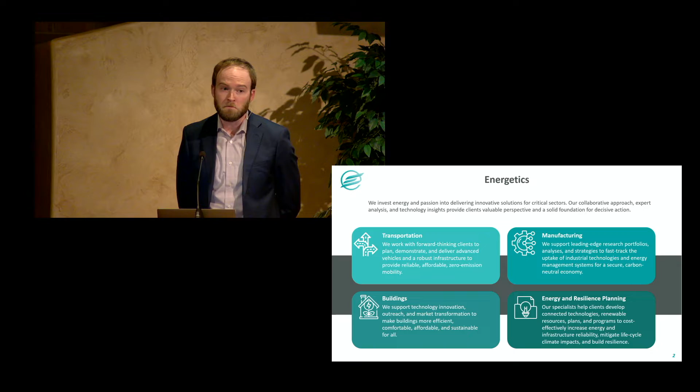We're a clean energy consulting firm that has been in business for almost 50 years. We were actually formed at the same time as the Department of Energy, in the late 1970s. Our founding fathers recognized that this fledgling thing called the Department of Energy would really need contractor support to further its agenda. So over the near 50-year history of our company, we've developed four main support areas: transportation, manufacturing, which is where I reside, green buildings, and energy and resilience planning.

Some of the work that we do, we're a company with a really deep technical bench. We really focus on technology, techno-economic analysis, and do technology feasibility studies, really trying to understand the benefits associated with technology deployment within a given industry. We'll back that up with market and economic assessments.

We're a company that is brought in to do third-party evaluation. So if there is a major player that's doing a technology demonstration, a first-of-its-kind deployment of some nascent pathway, we'll be an impartial third party that's brought in to validate those assumptions that are made.

We do a lot of strategic planning and technical road mapping, so we are contracted by our clients to do stakeholder engagement. We'll bring in stakeholders in a given industry, pick their brain. We do all the meeting planning, facilitate those meetings, do all the data analysis and the reporting associated with those stakeholder engagement events.

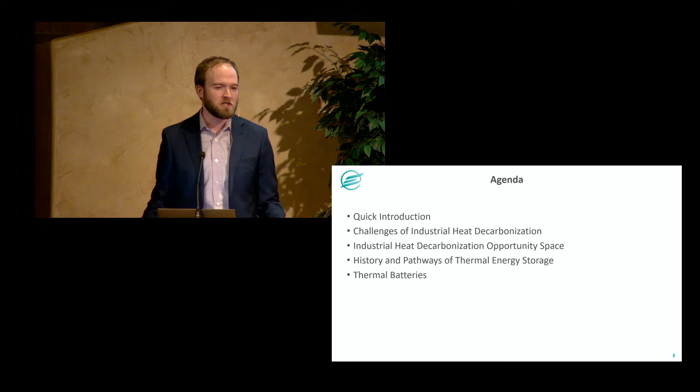So this talk today, I'm going to give a quick introduction of myself, and then launch into the talk where I'll cover challenges of industrial heat decarbonization, and then get into what are the opportunities, what are the solution pathways to decarbonize industrial heat. I'll then drill a little bit deeper into the history and the particular pathways associated with thermal energy storage, or thermal batteries, and then give some specific information about thermal batteries and some of their competing technologies.

So a little brief blurb about myself. I hail from the great state of Indiana, and studied chemistry and German at Indiana University. I liked those two things so much, I decided to go to Germany and study chemistry there. I did a master's degree at the Clausthal University of Technology, and afterwards worked as a researcher at the German Aerospace Center for networked energy systems.

My girlfriend at the time told me I better come home or else. So I came home and we got married and everything was great. But I came back here and went to the Colorado School of Mines to do my PhD in applied chemistry, materials chemistry to be specific, but leveraged a lot of those relationships in Germany to continue the collaborations with Max Planck Institutes for colloids and interfaces and coal research.

I then did a postdoc in material science at NREL, where I actually did research in thermal energy storage, so I'll touch on that a little bit. And now in recent years, I've transitioned to consulting, and I'm now a senior scientist and lead our industrial decarbonization analysis and modeling.

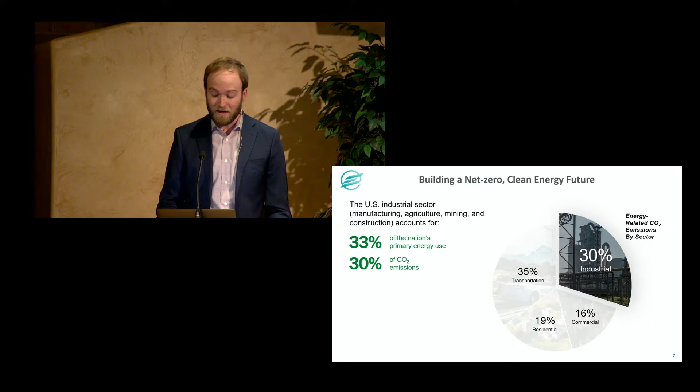So let's start talking about the industrial sector. Building a net zero clean future must include decarbonization of the industrial sector. The industrial sector accounts for 33% of the nation's primary energy use and 30% of its energy-related CO2 emissions. We anticipate our economy to grow from now until 2050, and the anticipated growth of 30% in the industrial sector could contribute to a 17% increase in CO2 emissions.

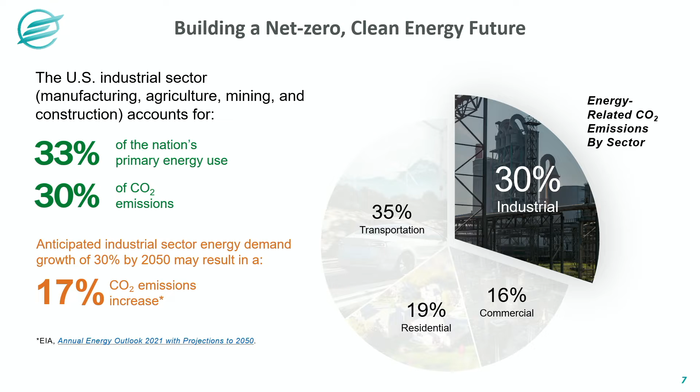So we really need to focus on industrial decarbonization and consider it an opportunity for America's economy. The manufacturing sector contributes nearly $2.8 trillion to the US economy, generates 12% of our GDP, and supports over 11 million jobs in this country. It's critical to decrease CO2 emissions while maintaining global competitiveness of US manufacturing.

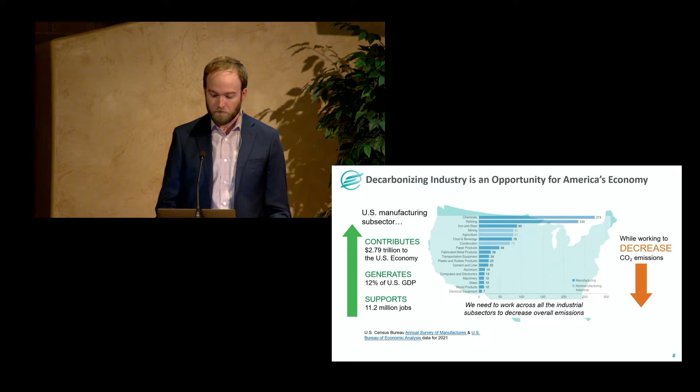This horizontal bar chart shows millions of metric tons of CO2 released annually in the United States. At the top you see chemicals, refining, major industries in this country. The dark blue are manufacturing sectors. The light blue are non-manufacturing industrial sectors of construction, agriculture, and mining. All are part of the parent industrial sector.

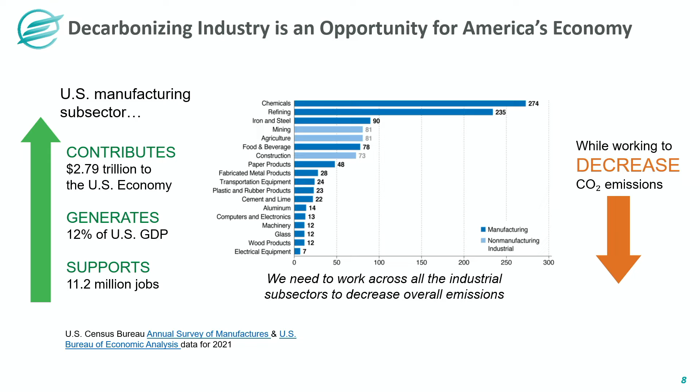All of these sectors, whether it's chemicals all the way down to glass manufacturing or fabricated metals, are extremely different and heterogeneous in their processes. So it's important that we work across all industrial subsectors to decrease overall emissions, and it's clear that there is no one-size-fits-all solution.

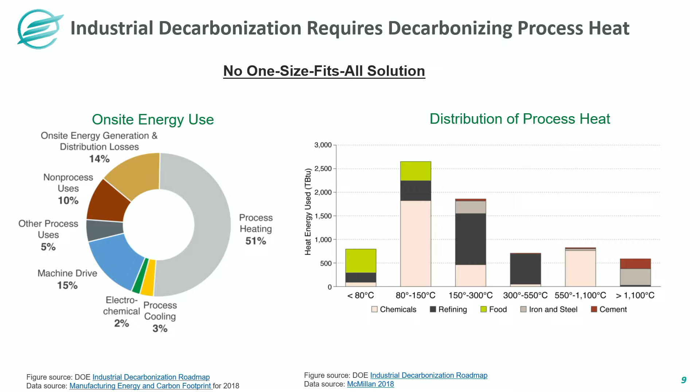This donut chart on the left shows on-site energy use, the energy used inside manufacturing facilities in this country, of all industrial sectors. What you see is that over 50% of the on-site energy use is for process heating, simply combusting fossil fuels to generate heat to drive some sort of industrial process.

On the right are bar charts that show the distribution of process heat of the five energy and emissions intensive industries in this country: chemicals, refining, food and beverage, iron and steel, and cement. From left to right, you see the process heat demand for particular sectors. Sectors like food have very low process heat demands, less than 80 degrees Celsius, mostly for drying and dewatering of food. But if you go all the way to the right, process heat demands are greater than 1,100 degrees Celsius, for industries like cement and iron and steel.

What's clear is that the solutions for those two options are completely different. I want to emphasize that a little further. Thermal demand below, let's say, 150 Celsius is an excellent candidate temperature regime for electrified technologies. Heat pumps are a technology that people are throwing around a lot now, but you can't just throw heat pumps into a cement kiln or a blast furnace in an iron and steel manufacturing facility. So thermal demands above 150 Celsius may require alternative sources of heat.

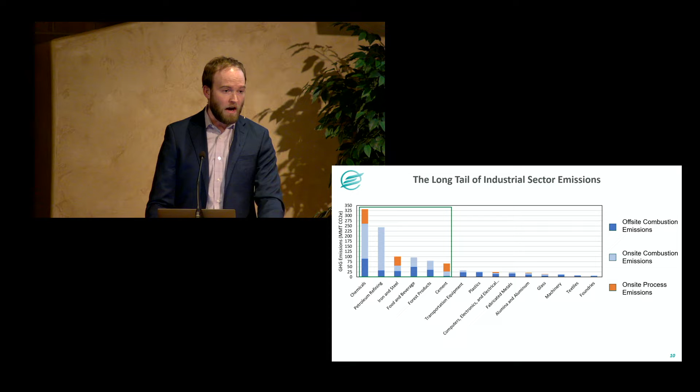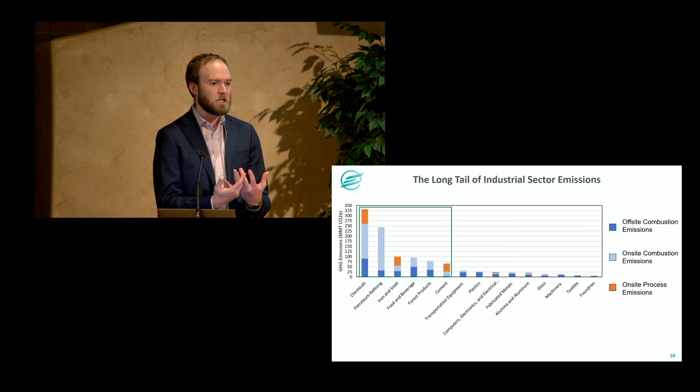Chemicals, big dog on the left. All of our energy and emissions intensive industries are on the left, and we could invest trillions of dollars just decarbonizing those five on the left. But I want to emphasize that there is a long tail of industrial sector emissions. We could focus on those five that are in the green box, but collectively on the right, all those that are not inside the green box, while individually they don't have a major footprint, collectively they're still a major emissions contributor.

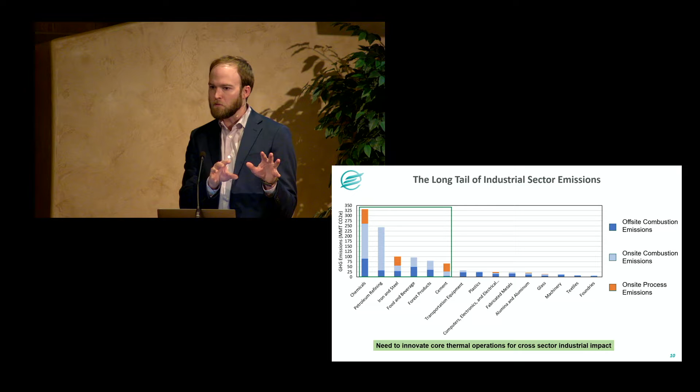So I want to emphasize here that we need to innovate core thermal operations for cross-sectoral impacts. Focusing all of our efforts on chemicals may not be suitable for foundries and textiles all the way on the right. But this cross-sectoral approach is challenging. It's challenging, but it's necessary.

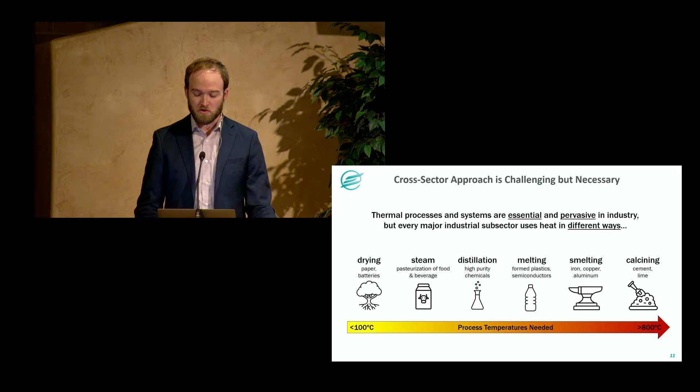Thermal processes and systems are essential and pervasive in industry, and every major industrial subsector needs heat and uses heat, but in different ways. There may be paper or food operations that are simply for drying and require low process heat, less than 100 degrees C. But as you get up to distillation processes in the chemicals industry, melting and forming operations for the plastics industry, smelting for metals, or calcination in the cement industry, you start getting to process heat demands that are very, very high.

Never been done before. And while that sounds like a lot of money, and it is, there are still systemic barriers to industrial decarbonization. A separate report published by the Department of Energy just this past summer estimates that the investment needed to decarbonize just the 8 industrial sectors shown here could cost somewhere between $700 billion and $1.1 trillion. That far exceeds what we have from IRA and BIL.

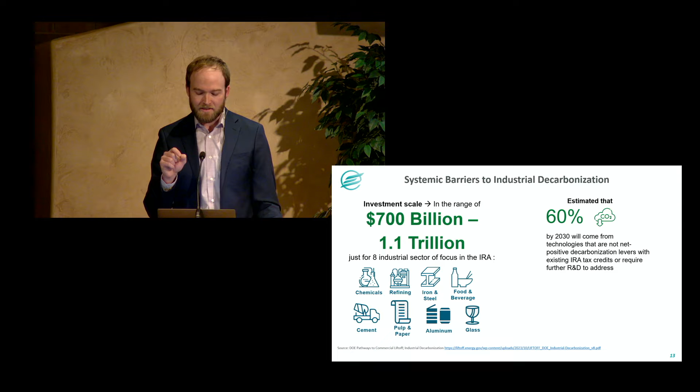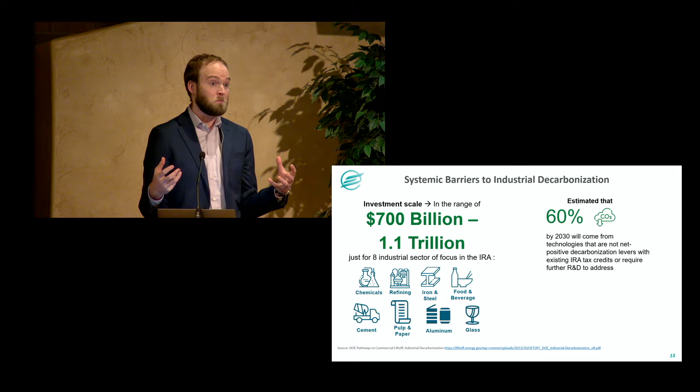That same report estimates that 60% of CO2 reductions by 2030 will come from technologies that do not yet have a net positive lever with existing IRA tax credits, which means that 60% chunk is going to require research and development into technologies that have not yet been industrialized. So I want to emphasize that targeted investment for research, development, and pilot-scale demonstrations is needed and is an opportunity for U.S. manufacturing.

But the U.S. Department of Energy has a real guiding light in the Industrial Decarbonization Roadmap, which was published in support of efforts from my company in the fall of 2022. This outlines barriers to industrial decarbonization and opportunities for industrial decarbonization. In that report are highlighted 4 interrelated and cross-cutting strategies to pursue in parallel. They're called the industrial decarbonization pillars: energy efficiency, industrial electrification, low-carbon fuels, feedstocks and energy sources, and carbon capture, utilization, and storage. Together, these things, working in tandem, can decarbonize the industrial sector.

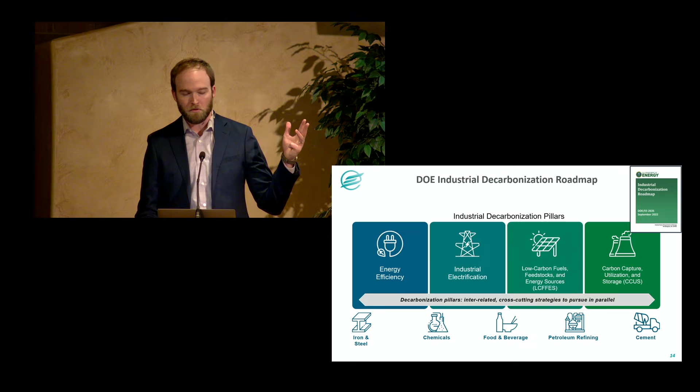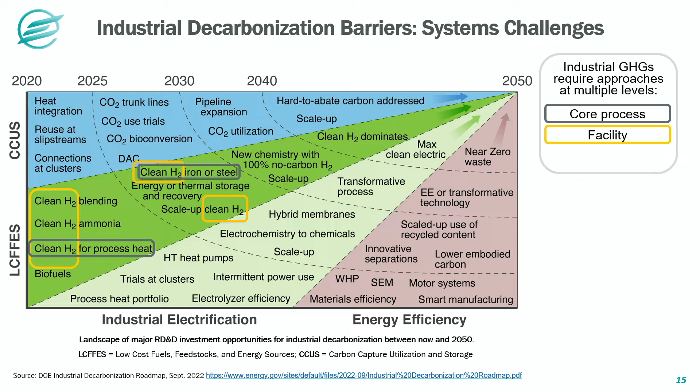But it goes beyond just the core unit operations. We need to start thinking about, well, how am I going to get hydrogen into my facility? Am I going to start producing hydrogen on site? Do I have the footprint to produce hydrogen on site? Am I going to buy it from some off-site merchant? How much is that going to cost me? Where am I going to get it from? What's the carbon intensity of that hydrogen? If I'm using gray hydrogen produced with natural gas, what's the point of investing in hydrogen? I'll just use natural gas.

But it goes beyond the facility level. What about beyond the plant bounds? This is where I highlight energy and thermal energy storage and recovery. If we really want to realize decarbonization on an economy-wide scale, we need to be thinking about all these things in tandem: innovating on the core fundamental unit operation level, innovating at the facility level, innovating on the economy level. And so this starts bringing up some questions.

What are the implications of expanded hydrogen use and generation? What are the implications of new thermal energy sources and systems? How can we do this smart? Not like the 1860s industrial revolution, but how do we do this smart in the 21st century? How do we integrate automation? How do we integrate all these things together? How do we do data analytics? How can we leverage that?

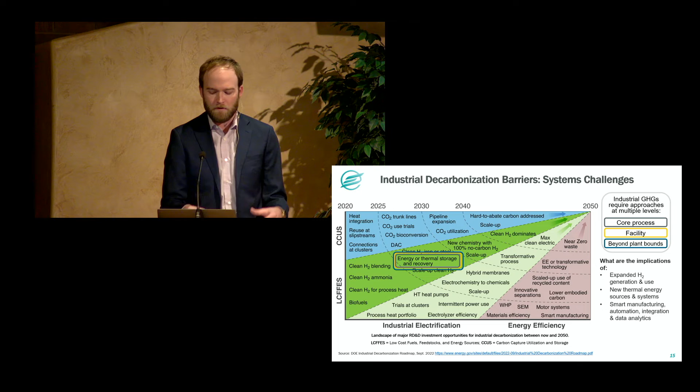What does transition to clean electricity really look like in an industrial facility? And how can we leverage our analysis and our know-how to continue pushing policy forward? IRA and BIL are great starts, but we need to keep moving forward.

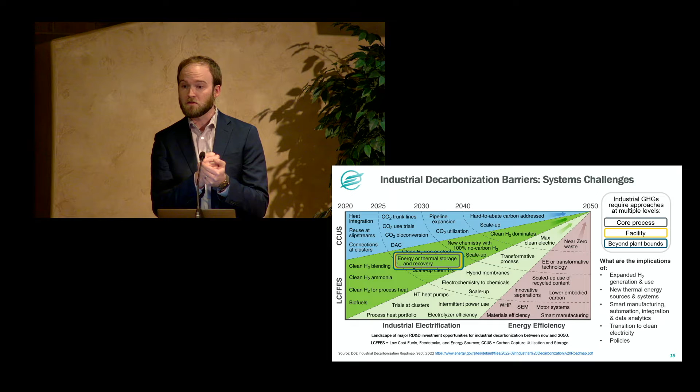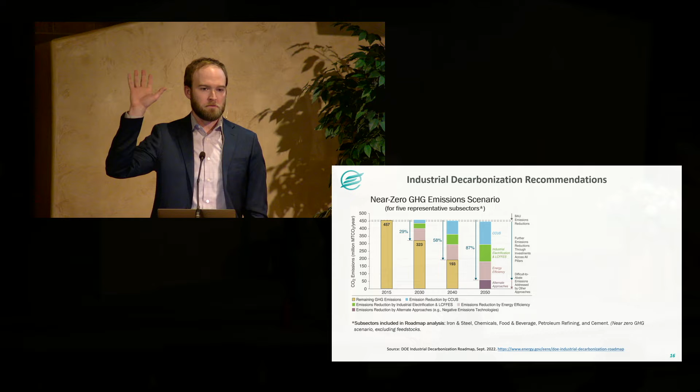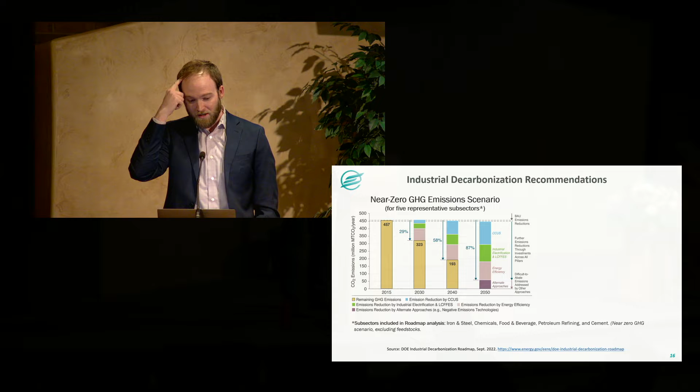But I want to emphasize that there's hope. This is kind of the flagship graphic from the Industrial Decarbonization Roadmap. If you guys want to read all 480 pages, I really encourage it. It'll put you to bed.

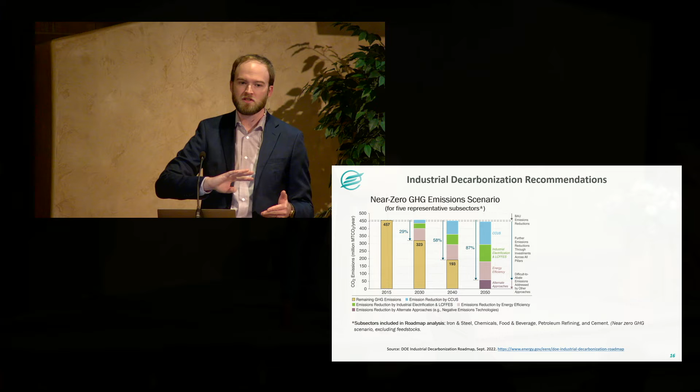But if you take nothing else away, take something away from this. If you look at the far right, the stacked bar chart there of the different colors, that is the most optimistic near net zero scenario analysis that we did. It shows that if you do these four decarbonization pillars in tandem, carbon capture utilization and storage, low carbon fuels, feedstocks and energy sources, electrification, energy efficiency, by 2050 we could approach nearly 90% emissions reductions. But that remaining 10 on the bottom, alternate approaches, shows that even if everything goes swimmingly, there's still research, development, demonstration that's going to be needed to innovate emerging nascent technologies to fill that gap.

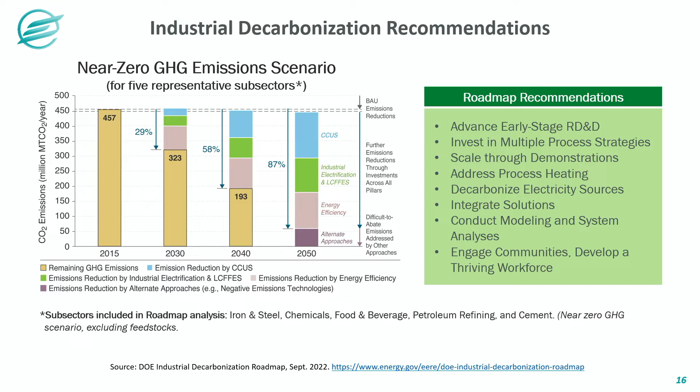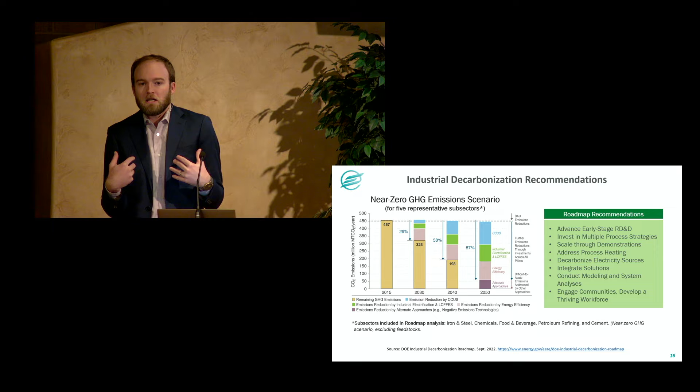And the roadmap highlights specific recommendations that really guide the investments that the Department of Energy is making today. We need to continue to advance early stage RD&D, research, development, and demonstration. We need to invest in multiple process strategies. We need to really emphasize demonstrations. Industry is averse to risk. They want people to show them that there's no risk. Let's demonstrate that there's little to minimal risk so that these technologies can be industrialized and incorporated into the commercial sector.

We need to address process heating. I hope I've emphasized that. That's the big dog that we need to tackle. We need to decarbonize electricity sources, conduct modeling and systems analysis, and engage with the community and develop the workforce that is going to take us to those 2050 goals.

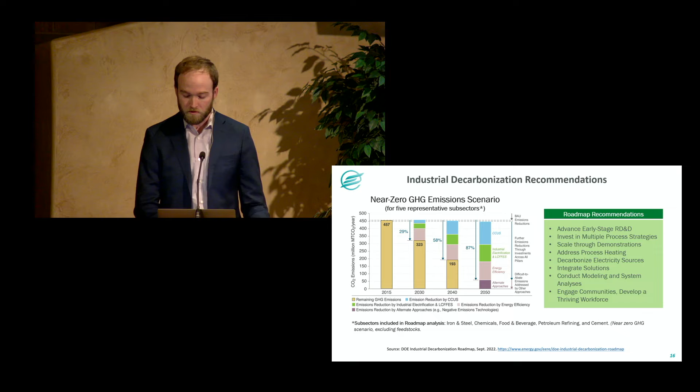So I gave you an overview on industrial decarbonization. And now I want to drill a little bit deeper and start picking at industrial heat a little bit more specifically. So the Biden administration, one of the first things they did is they kicked off this initiative called the Energy Earthshot, which harkens back to the moonshot that Kennedy kicked off in the 1960s, that decarbonization is such a critical need that we need an all-hands-on-deck approach to tackle some of these really critical cross-cutting challenges.

So I encourage folks to look up the Energy Earthshots. There's 8 of them in total. There's one on long-duration energy storage. There's one on hydrogen, on geothermal. There's one on buildings. This one, my favorite, of course, is the Industrial Heat Shot, which has a target to develop cost-competitive industrial heat decarbonization technologies with at least 85% lower greenhouse gas emissions by 2035.

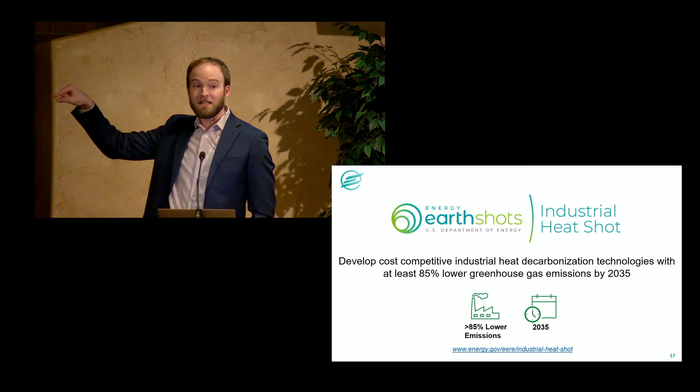That 2035 is really important because we need to meet this goal so that we can really meet the overall 2050 goal, 15 years later. So in this heat shot, the imperatives of decarbonization of U.S. industrial heat were identified. The first is that incremental solutions are insufficient. Business as usual is insufficient. We need to have another industrial revolution that reinvents the manufacturing and industrial sector.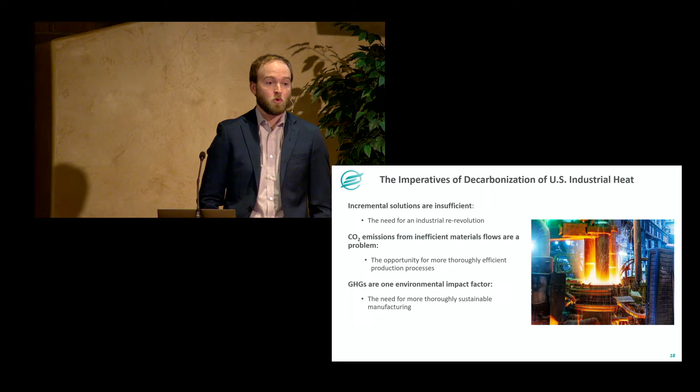CO2 emissions from inefficient material flows are a problem. We need to be efficient in production processes, and greenhouse gases are just one environmental factor. What about pollution more broadly? What about people that are affected at the fence line? What about historically disadvantaged communities? We need to make sure that the next generation of manufacturing is sustainable and does not add additional burden to communities that have historically shouldered much of the burden of manufacturing. Cancer Alley in the Gulf Coast comes to mind.

The Industrial Heat Shot identified some key characteristics. Manufacturing is diverse, it's heterogeneous, it's got a lot of different processes, a lot of different operations. Heat is used in tons of different ways. So we need solutions that meet or exceed operational demands today, that are cost competitive, industry's got to buy into this, and can achieve industrial scale, really important.

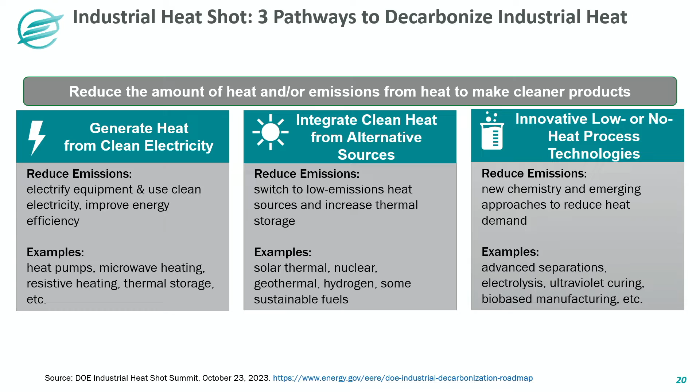So the source on the bottom here, the Industrial Heat Shot Summit, happened October of last year, just a few months ago. The Secretary of Energy presented, Deputy Secretary Turk presented, John Podesta from the White House, congressmen were there presenting on the importance of this industrial heat shot.

And in that summit, 3 pathways were identified. Pathway number 1, we need to generate heat from clean electricity. This includes heat pumps, thermal energy storage is thrown in there. We need to also integrate clean heat from alternate sources. Can we leverage the sun to generate heat? What about nuclear? What about using the heat that's right beneath our feet in geothermal resources? Hydrogen, sustainable fuels. And the final pathway is really a game changer. Can we develop innovative, low or no heat process technologies? Could we just rethink this all together? Could we just find a way to not use heat and make the same stuff that we use every day?

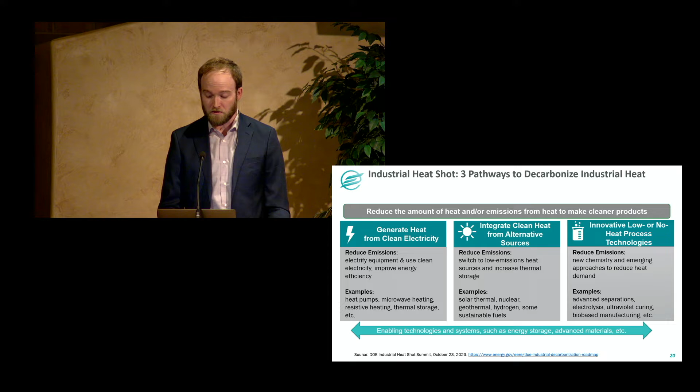Underpinning all of this is that we need to develop technologies that span all of this. We need to do things like energy storage and advanced materials and everything that serve as the foundation for these pathways. So I really want to focus on that pathway number 1, generating clean heat from clean electricity.

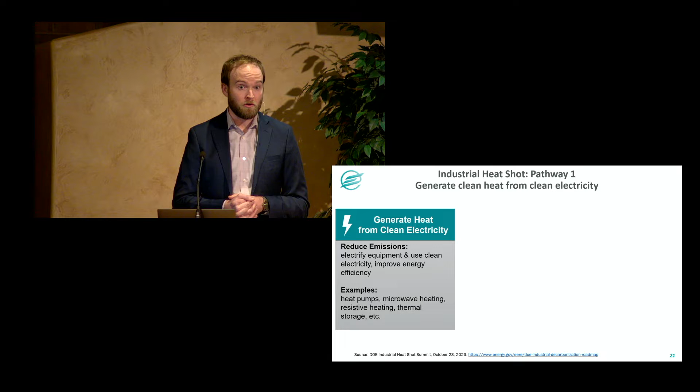Reducing emissions by electrifying equipment, using clean electricity, improving energy efficiency. Examples are heat pump, microwave heating, resistive heating, thermal energy storage. The opportunity here is we've got to reduce fossil fuel use.

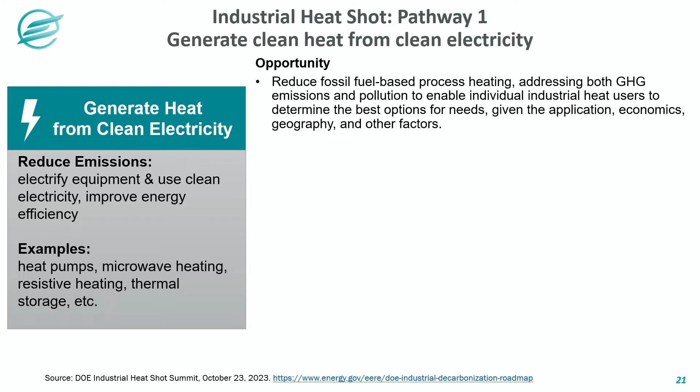Given specific applications, the economics, the geography is really important. The cost of electricity is way different in Washington State than it is in North Dakota. I'll touch on that a little bit later.

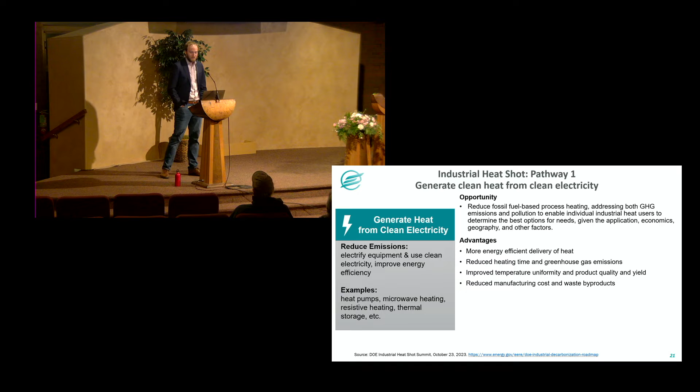What are the advantages of this pathway? Well, we can be more efficient in how we deliver heat. We can reduce heating time because electrical heat is more efficient than combustion heat. We can improve temperature uniformity, improve quality of products, the yield of products. Boy, that really gets industry people excited. We can reduce cost, also makes industry people really excited, and reduce waste byproducts.

But there's key technical challenges. Achieving these temperatures is challenging, especially given specific application requirements. Scale - we've got to get these things to industrial scale. And cost - the cost is a challenge because the cost of electricity relative to natural gas is a major barrier in this country.

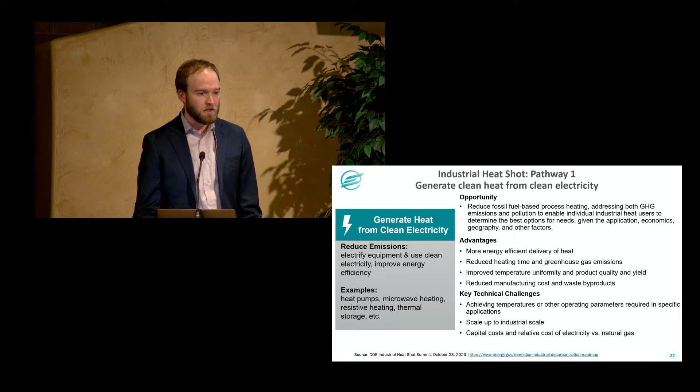I mentioned Washington and North Dakota. Washington has really, really cheap electricity prices, largely because of their hydroelectric production. So they are only 3 to 1, the cost of electricity relative to natural gas - cost of electricity is 3 times more expensive than the cost of natural gas in Washington state. Whereas in North Dakota, where they have very limited access to low-cost electricity production, it's more like 5 to 1. How do you make those economics work out on an industrial scale?

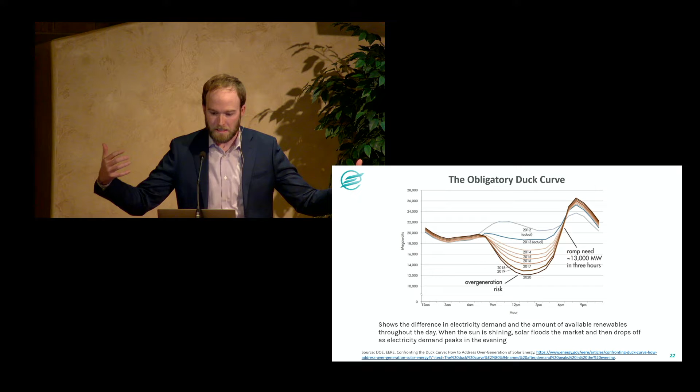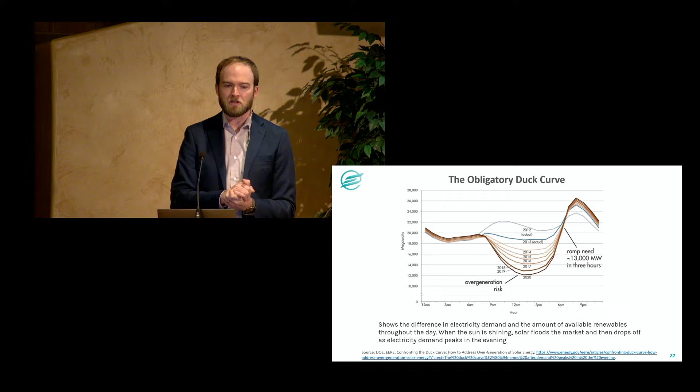We have a lot of renewable resource during the middle of the day, very little renewable resource at the end of the day. This graph shows 2012 through 2020. And already in 2020, we started reaching a point where we were at risk of overgeneration - we're producing more electricity than we could possibly need at 12 p.m. in the afternoon. But then when everyone comes home and starts turning on all their devices, boy, that puts utilities in a really difficult position with this rapid ramp up in demand.

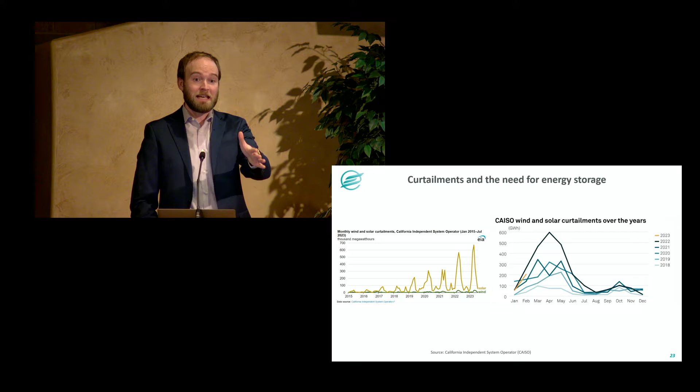And the result is something called curtailments, that we have all of these renewable assets deployed, wind farms and solar farms. What's happening is we're reaching a point where we're producing so much that we're having to shut off those assets. We're having to curtail clean electricity production because we have too much of it on the grid. This is data from California, published by the government's very own Energy Information Administration, EIA, and it shows monthly curtailments in the state of California from 2015 up until the present day in 2023. What you see is this nearly exponential rise in monthly curtailments in the state of California because there's so much renewable energy generation in that state.

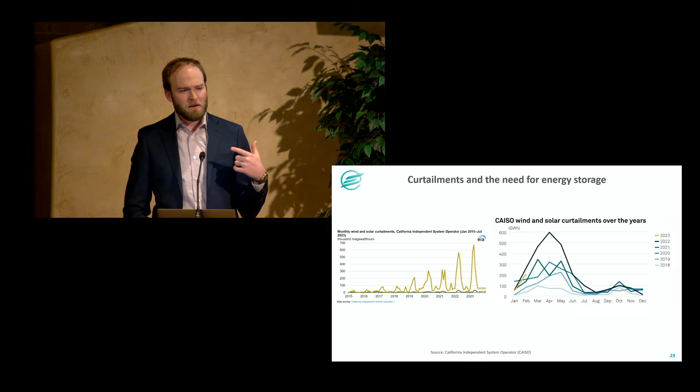Let's think about this on a monthly scale. On the right, what you see are curtailments in the months of the year. The big issue is right around now, as we're entering into spring. Sun starts coming out a little bit more, but it's not too hot, so our ACs aren't kicking on as much, and we're generating a lot of electricity. We're overproducing electricity in a seasonal fashion - too much in the spring, not enough in the summer.

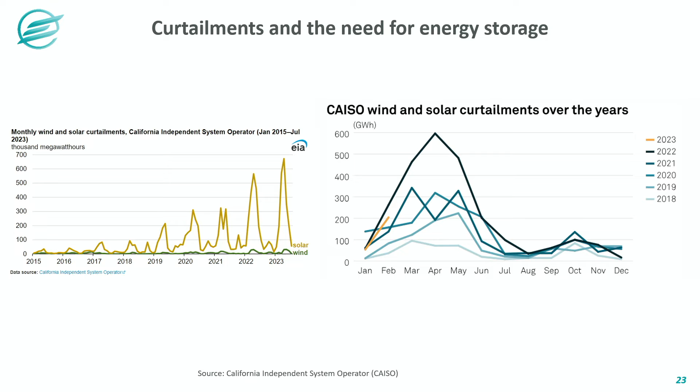Energy storage is a solution to this. Can we capture the overproduction that we have when we generate it, and then use it or dispatch it when we need it?

Likely a lot of you have seen a chart like this that shows the energy storage capacity - how much can be dispatched, so kilowatt hours on the y-axis versus the capacity on the x-axis. What's on here is a bunch of different energy storage technologies. As is typical, lithium-ion batteries are kind of closer to the bottom left. You can turn them on right away, but they don't have a whole lot of capacity. We all know we got to charge our phones every night because it runs out of batteries, right?

Whereas things like thermal energy storage are near the upper right. They have a lot of capacity and can discharge over a long period of time - hours, maybe even days. I want to emphasize that I'm not saying thermal energy storage is better than lithium-ion batteries. We need all these technologies. We can't quickly ramp up a thermal energy storage facility - it's like a diesel engine, takes a while to warm up, but then it just chugs along. Whereas lithium-ion batteries, I need power right now, boom, I got it. So these things need to be working in tandem to give us a holistic approach to energy storage.

So let's start talking about thermal energy storage. I'm at 30 minutes, hopefully I'm not boring you guys.

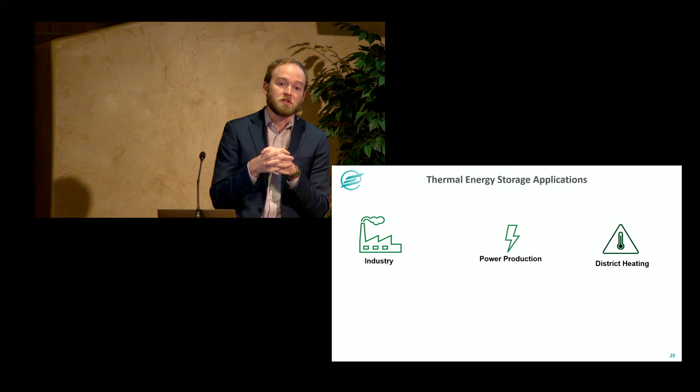Thermal energy storage applications have really taken root in three main end-use applications. The first is industry. This makes sense - there's really hard to decarbonize sectors with really high process heat demands. Thermal energy storage will enable and ensure that a manufacturing facility can have reliable 24/7 heat delivered to their operations, and it allows them to load shift. That's the big thing with energy storage - overproduction during the day, electricity is really cheap. Can I pull that off the grid and use it during those high ramp times when electricity prices start skyrocketing?

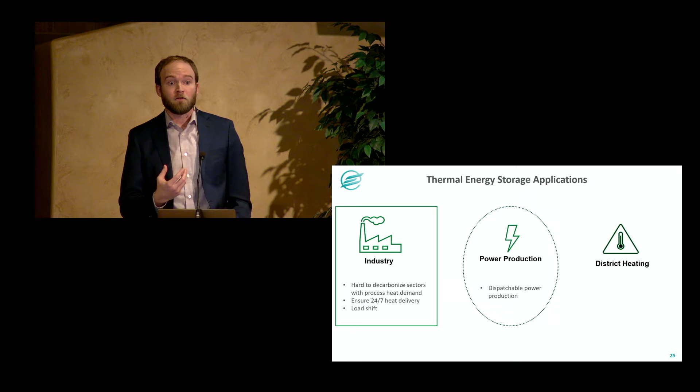The second, and I think where a lot of the learning for thermal energy storage has come from traditionally, is the power sector. Thermal energy storage has been used in the power sector to make power production dispatchable, using it when I need it. The third application I won't touch on in this talk - it's district heating. It's commonly done in Europe, less so in the United States.

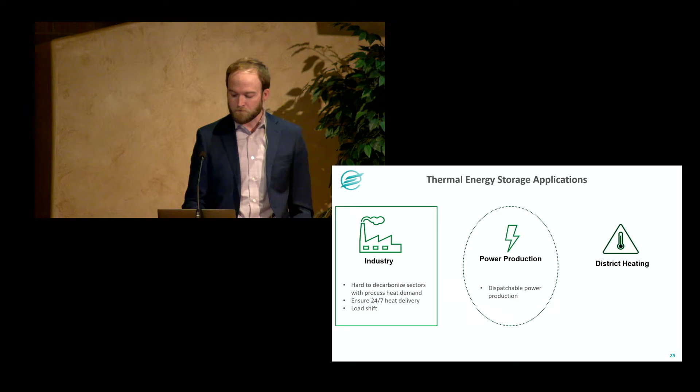Let me give a little bit of history. I'm kind of a thermal energy storage traditionalist - as Martin said, I used to be at NREL, I worked in concentrating solar power thermal energy storage. Since the 1990s, thermal energy storage has really come from power production. Let me give an overview of what thermal energy storage is for those that have not come across this in the past.

Thermal energy storage has really come in lockstep with the development of concentrating solar power. Concentrating solar power is sort of the redhead stepchild of photovoltaics. Everyone knows solar power means PV, right? Solar panels on our houses. Well, the other solar power is concentrating solar power. So let's talk about that a little bit.

In principle, what you have is a bunch of mirrors that reflect the sun's rays to a focal point - in this case, it's a tower. In that tower, you can start flowing a heat transfer fluid around, and at that focal point, the heat transfer fluid will start heating up. Isn't that great? Then you can take that heat transfer fluid down and store it in some tanks. You can store heat in a vessel, and then whenever the market says, boy, I need electricity right about now, you can flow it out of your tanks.

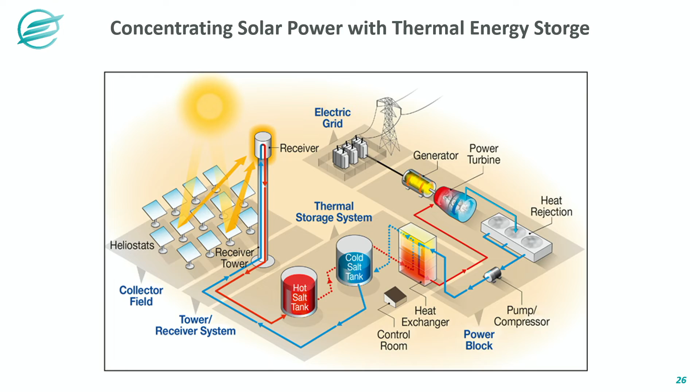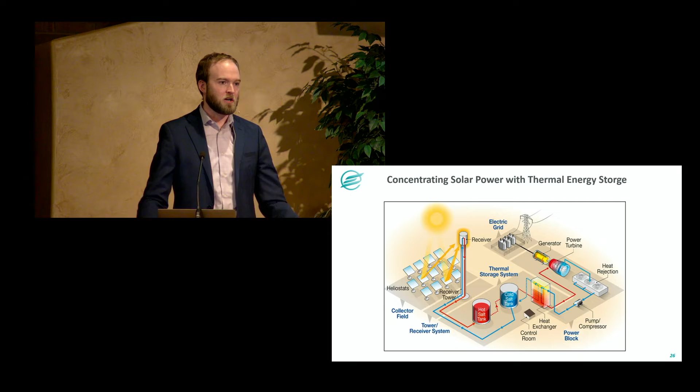I don't think I have a pointer, so I'm just going to use my hands. You can flow it out of those tanks to a power block, and then it's really no different in principle to a standard utility natural gas or coal-fired power plant. You've got a heat exchanger where you exchange the heat in your heat transfer fluid with a working fluid, usually steam, and then it flows through a Rankine steam cycle, spins a turbine, which goes to a generator. You generate electricity, boom, you got power. Isn't that great?

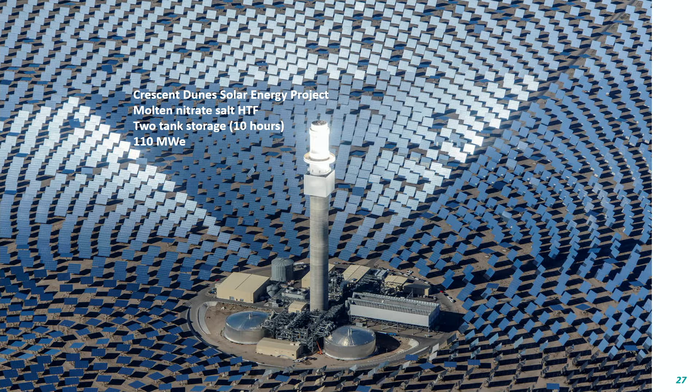This is a technology that has been deployed somewhat successfully in the United States. This is a bird's eye view of Crescent Dunes Solar Energy Project in Tonopah, Nevada. It's a molten nitrate salt power tower configuration similar to the schematic I showed on the previous slide. Molten nitrate salts is the heat transfer fluid and the storage medium at this facility. It has 2 tanks, so you see that in the foreground there, 2-tank thermal energy storage. It's rated to have a storage length of 10 hours, and it had a capacity, at least they claim to have, of 110 megawatt electric.

Pretty substantial. This is a cautionary tale, though. This particular project received about a $740 million loan from the DOE Loan Program Office to build it. It was built and commissioned in 2014. It started production in 2015 and almost immediately started experiencing problems. This company has since gone bankrupt. It's changed hands a bunch. They fixed the problem, but it doesn't nearly have the power production that it was rated to have when the project was conceived.

The issue is right there in the foreground, the thermal energy storage system. The tanks started experiencing leaks. And boy, you don't want to have molten salt leaking all over the place. It causes a lot of problems. So there's still a lot of learnings. I could talk all day about Crescent Dunes, but I just want to emphasize that this is a technology that can be built at scale, and we can take the learnings and the pitfalls from certain issues from projects and apply that to new industries like the industrial sector.

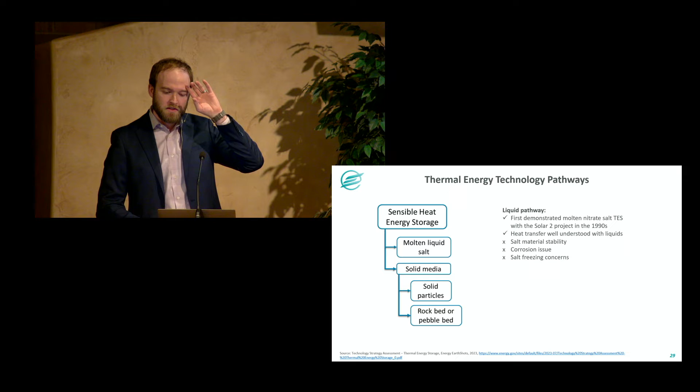So I'll do a quick overview, kind of pros and cons of each of these. Let's start with sensible heat storage. Again, there's two main pathways there, liquids and solids. For liquids, like I said, this has been demonstrated successfully. Molten nitrate salts, as I showed on a couple slides, have been in the works since the Solar 2 project was done at Sandia National Labs down in New Mexico in the mid-1990s. The benefit of liquids is heat transfer is really well understood. We do heat transfer in industry all the time. That's no big deal. Big issues here are salt material stability. I mean, think about water.

It can boil, it can break down, it can change phase—really funky stuff with these media. Corrosion issues are really, really tough. High temperature, very acidic salts will just eat away at a tank and cause it to leak, for example, in Tonopah, Nevada at Crescent Dunes.

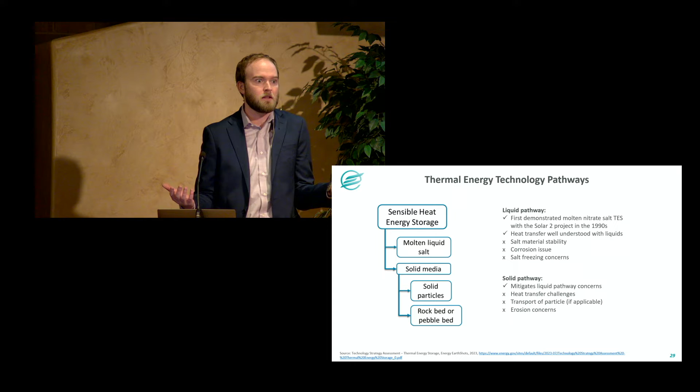Real big concern with the liquid pathway. If you start thinking about using bricks instead, well, that mitigates a lot of those concerns. It's not going to break down, it's not going to corrode, it's not going to freeze on you. It's a solid. But heat transfer is a bit more of a challenge for solids.

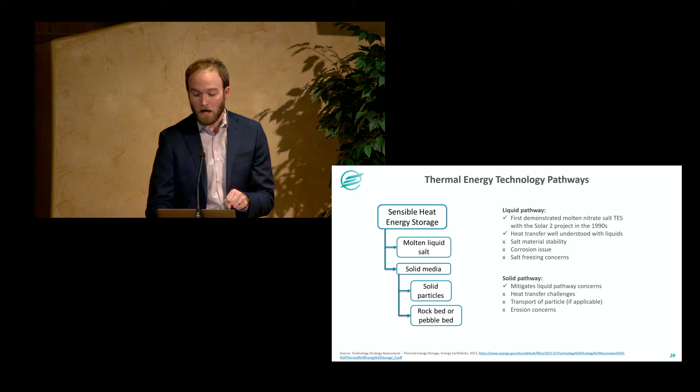The transport of the solid can be challenging if applicable, if you're using sand or particles, which are very popular right now—you've got to move that around somehow. And the final thing: instead of corrosion, we have erosion. That will start rubbing and cause mechanical degradation of your system.

On this slide, I just kind of lumped together latent heat and thermochemical energy storage because they're less cool than sensible heat storage. Latent heat is attractive because it's more energy dense. If you're transitioning from a solid to a liquid, you can store more energy in a phase transition than you can just in a single phase of matter, whether it be a solid or a liquid. So with increased energy density, that means I don't have to have as big of a footprint. That's attractive for industry. And we have centuries of experience with this.

How much have we dealt with the water, liquid water, and ice transition? In downtown Berlin, I was just there in the summer, they have a big tank for water, and they do thermal energy storage there with the transition from water to ice. That's great, but the problem is you can't reach high temperatures that are really needed for industry. It's pretty good for district heating, or heating up my water heater at home for personal use, but not for high temperature applications. Material degradation is a problem as well.

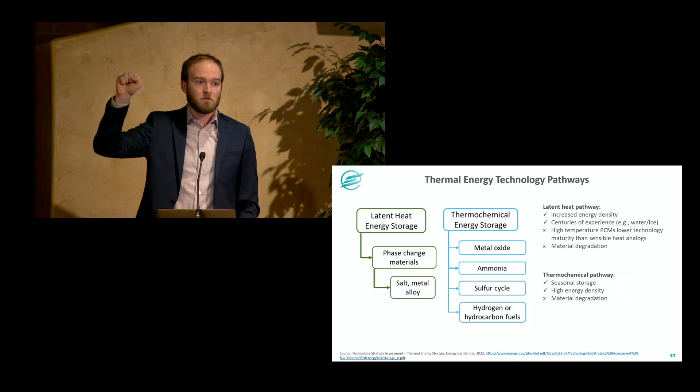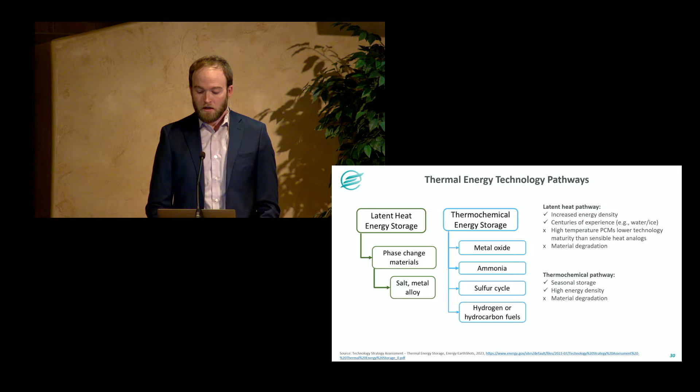For thermochemical storage, this is really the only way we could ever possibly achieve seasonal energy storage—I want to use solar energy from the spring and dispatch it in the winter. The only way to do that is to really store energy in the form of chemical bonds. It has high energy density as well, but it also has material degradation issues.

So I've given a little bit of a history of thermal energy storage. So what is a thermal battery specifically? Well, can I just take away the solar receiver from a concentrating solar power plant, and switch that energy input to something else, like abundant, clean electricity from the grid during periods of overproduction, like I was mentioning earlier? If you conceive of that, it's not too different from a concentrating solar power plant—it's just that your thermal input is a little bit different.

So instead of the sun and a solar receiver, you just have electricity driving some sort of heat pump, or an electric heater or something, that then goes into a thermal energy storage system that can then be discharged to a heat engine, like a Rankine steam cycle, like I showed before. And it's established on very sound thermodynamic principles. It's great.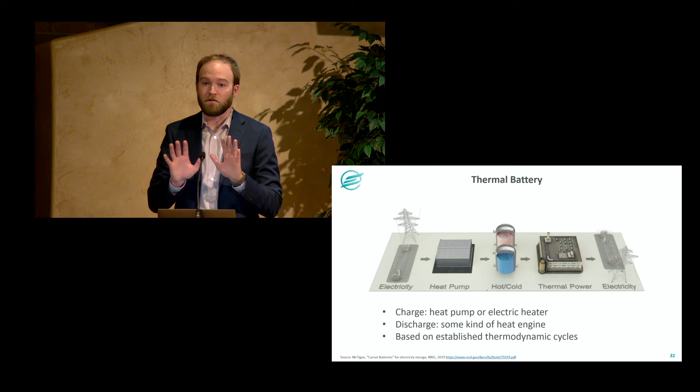It really enables you to do a lot of things. I've mentioned concentrating solar, I shouldn't talk about it anymore. But thermal energy storage allows you to get over intermittent renewables—I hope I've demonstrated that in this talk. It allows you to take base load operations like nuclear, which produces this amount of electricity all the time and doesn't change—if it does change, we have problems. So it allows you to take firm electricity production and make it dispatchable, use it when I need it. It allows you to capture high-quality unusable heat, which is particularly interesting for industry—there's a lot of waste heat in industry that just gets vented out the stacks.

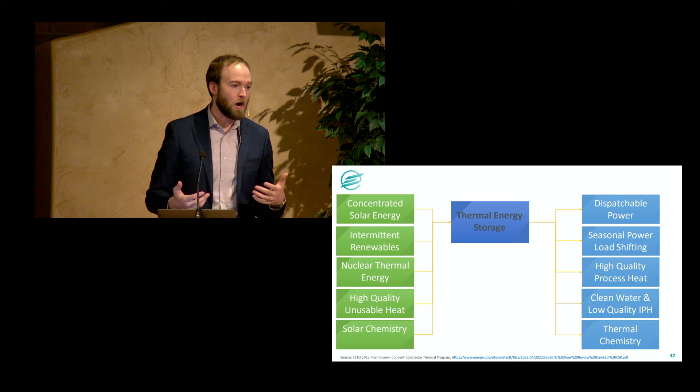We could capture that with a thermal energy storage device, and solar chemistry as well. What you get out of this is dispatchable power - I'm going to get power when I need it. It allows you to load shift, sometimes seasonally, but certainly on a diurnal basis, tens of hours kind of thing. It allows you to deliver high-quality process heat to industry, do municipal operations like water purification for drinking, and other applications for low-quality process heat. And it allows you to do thermal chemistry - can I make the products that we all rely on using inputs other than fossil fuels?

I just want to highlight at the end of my talk some resources. This is data from a publication that came out over the summer - DOE put out a pathways to commercial liftoff for long duration energy storage. This is focused on power production, not thermal energy storage for industry, but it's instructive because it looks at the barriers, opportunities, and economics of competing energy storage technologies, including thermal. On this chart you see the capacity - how much energy you've got in your storage device.

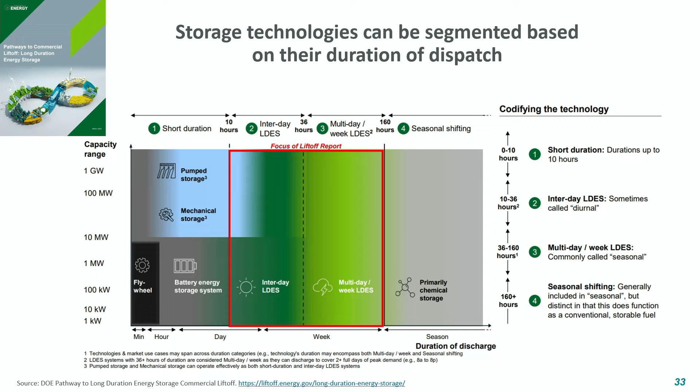Versus its duration of discharge - how much energy can I get over an amount of time. In the red box is where thermal energy storage, right there in the middle, sits. A lot of the things I've been talking about are indicated on this slide. Chemicals, storing energy in the form of chemical bonds, will give you seasonal energy storage for as long as you want. Whereas things like batteries and flywheels are on that lower capacity, lower discharge duration on the bottom left.

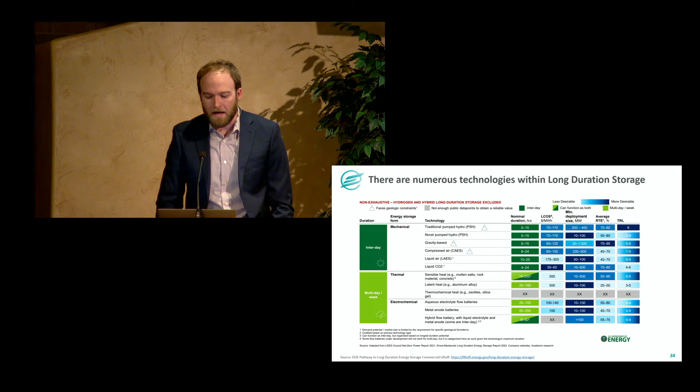Something really instructive about this is the report looked at a lot of the properties or aspects you want to see out of competing energy storage technologies. I drew a little box around thermal there - it's one of those technologies that can give you multi-hour, maybe multi-day energy storage capability. On this chart they looked at how many hours can you store, what is the levelized cost of storage - how many dollars per megawatt hour does it cost me, what's its size, how much can I deploy in megawatts, and what is its average round-trip efficiency, that's what RTE stands for.

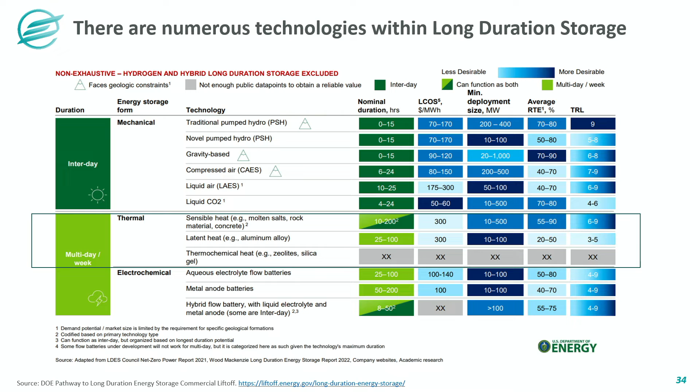And TRL - technology readiness level. 9 means this thing is ready for prime time, ready to be deployed in industry. 1 means this is still in the academic phase, needs a lot of research and development. What I want to emphasize is dark blue means more desirable, light blue means less desirable. Thermal energy storage has a lot of desirable attributes - it's dark blue, really great, except for the levelized cost of storage which is on the light blue end. So there's still a lot of work to make this technology cost competitive.

The final eye-crossing chart I'll show today is supply chain vulnerabilities. We need to be thinking about this from a Department of Energy standpoint. We can't be reliant on foreign supply chains or materials from conflict zones or from political adversaries - these are things we need to consider in the Department of Energy. We've certainly seen the issues with supply chain reliance as part of the COVID-19 pandemic, so it's really important to study this.

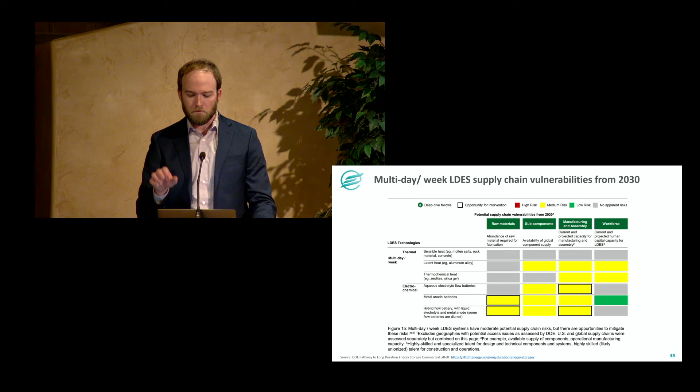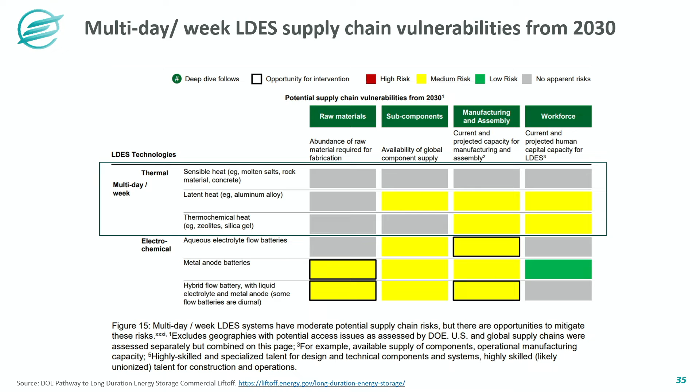Here we have a stoplight approach - green, yellow, red means low, medium, and high risk, gray means there's no apparent risk for raw materials acquisition, the subcomponents necessary to build your system, the manufacturing and assembly of your energy storage system, and the workforce needed to build it. Highlighted here is thermal energy storage, and I really want to emphasize the sensible heat at the very top, which is what is being deployed commercially today and I think will be the front runner from now until 2050. It's all gray - there are no apparent supply chain risks for this particular technology pathway. It really demonstrates that this is something we can invest in with some level of certainty.

So kind of wrapping things up, I just want to emphasize that industrial decarbonization is informed by stakeholder engagement and by analysis.

It is really important that investment decisions, whether you're the Department of Energy or you're a business, are made in a defensible and justifiable manner.

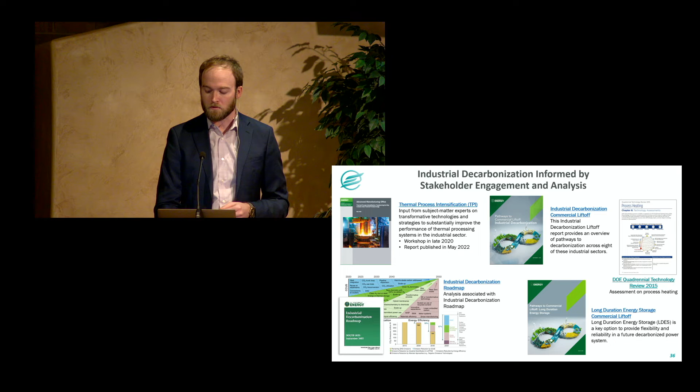So we have done, on behalf of the Department of Energy, stakeholder engagement for thermal process intensification, talking with experts in the field. We've written the industrial decarbonization roadmap. There are commercial liftoff reports for industrial decarbonization and for energy storage. And we've done deep dives into specific technology pathways in the quadrennial technology review. Across DOE, industrial decarbonization is really getting a lot of attention.

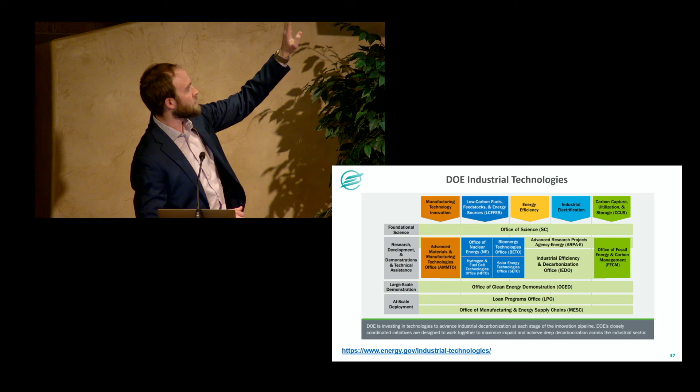This is kind of a map of DOE. Across the 4 pillars that I mentioned before, feedstocks, energy efficiency, electrification, there's a 5th pillar of manufacturing technology innovation now. All these offices are participating in industrial decarbonization technology development, whether it be foundational science by the Office of Science, or the applied energy offices that focus on R&D and first of its kind demonstration and deployment, and then the new offices that have been propped up by the Inflation Reduction Act.

The Office of Clean Energy Demonstration is brand new and really focuses on large-scale demonstration. The Office of Manufacturing and Energy Supply Chains, MESC, also brand new, focuses on deployment of technologies at commercial scale.

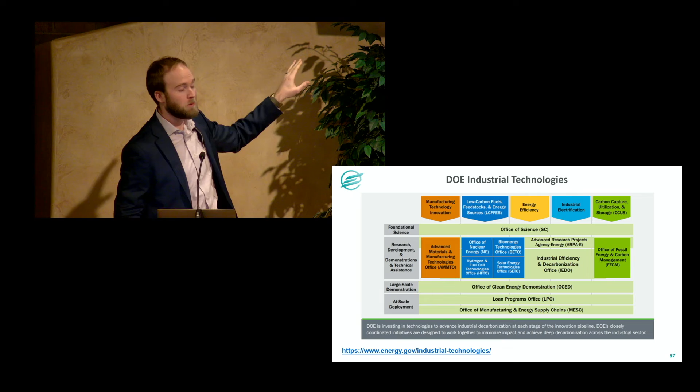Oh, and I just want to emphasize this, I made it big. Industrial decarbonization is getting so much attention, the DOE has made a landing page for all industrial decarbonization technologies, agnostic of any one office here or there. So it's a one-stop shop for all of your interests in industrial decarb.

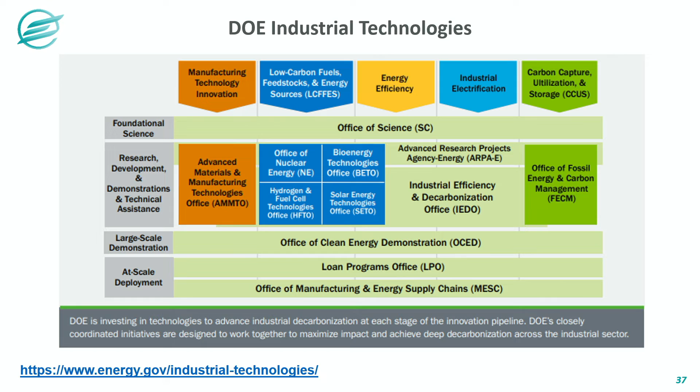And super high tech, I took a screenshot of 2 projects I really want to highlight. This is part of the flexible industrial energy use topic, where 2 projects were funded, each getting $5 million of federal funding to decarbonize or to develop technology associated with those 2 hot topics I mentioned: sensible heat storage for the liquid pathway and the solid pathway.

The top one is a company, Electrified Thermal Solutions, that is developing electrically conductive fire bricks, really fancy bricks, that will store heat and dispatch it for industrial use. The second one, which I'm particularly excited about because of my background in chemicals and refining, is through Shell, an oil refiner that is going to be deploying molten salt technology that has been commercialized or demonstrated and commercialized since the 1990s in their manufacturing facilities to produce decarbonized steam.

So very exciting there. Stay tuned over the next several years as these projects progress. And with that, I thank you for your attention, and I'm happy to take questions.

How bad was I? 52 minutes. Sorry about that. Okay, and I have the microphone for the Q&A.

First question here from Steve. Thank you, Martin, that was wonderful. I appreciate the progress that came through legislation earlier in the current administration. Is there any legislation in the preceding administration that helped facilitate all of this?